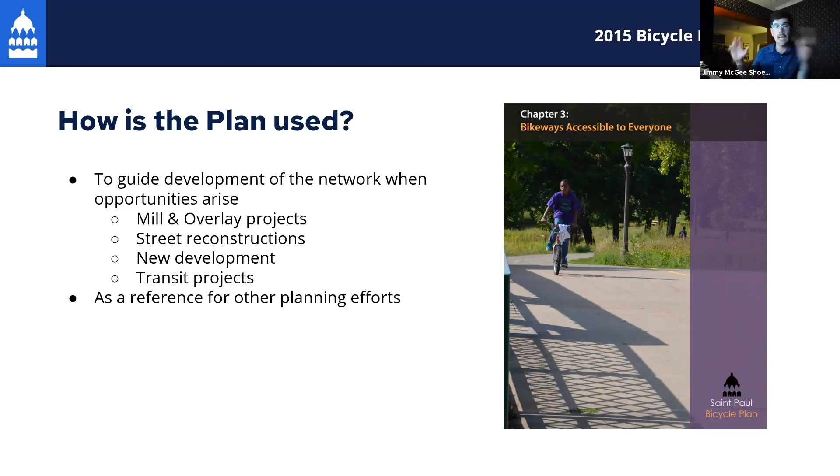Progress we've made since 2015: we've implemented 67 miles of bike facilities added since 2015. I made this presentation about a month ago, and that's already out of date - we've already added more miles this construction season. That includes implementation from our partners at Parks and Rec, Ramsey County, MnDOT, and the DNR.

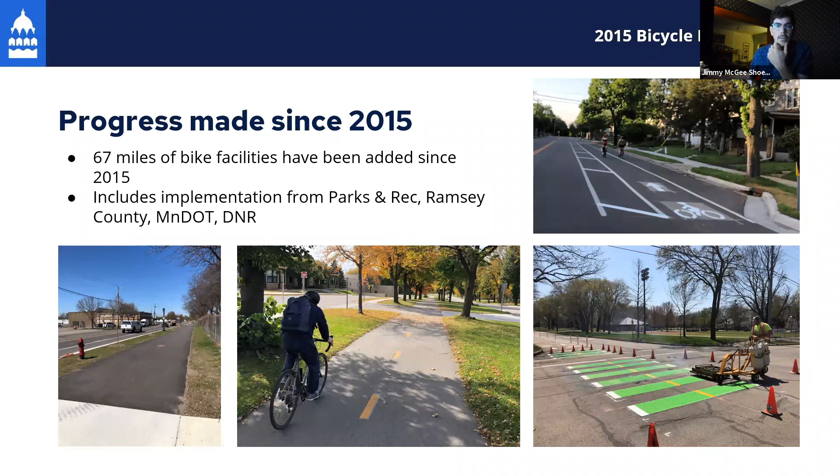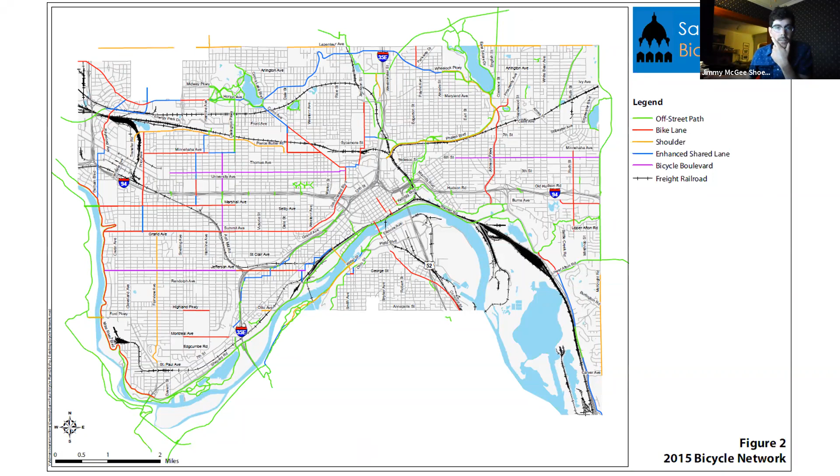This is what the bike network looked like in 2015, basically when the original plan was created and adopted. In those 6 short years, we've added all of this mileage, and the different facility types are represented by different line colors. A lot of miles of bike lanes and off-street paths have been constructed, and you're probably familiar with the Grand Round.

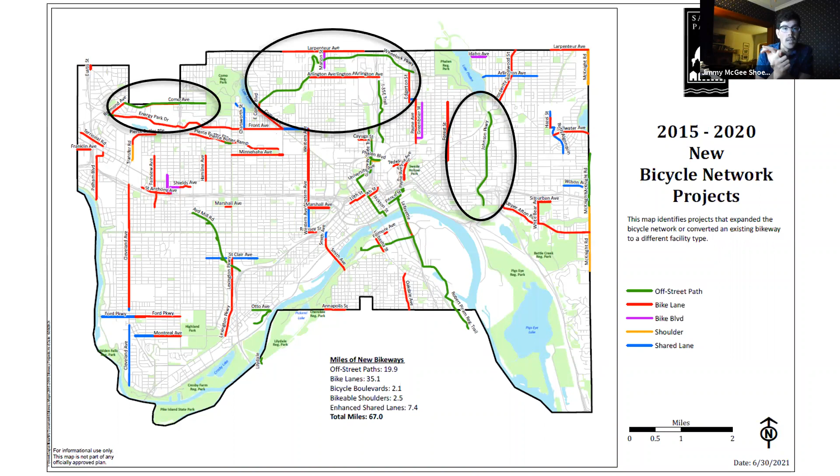This is the time to mention that out of the 2015 plan came some big recommendations. A couple of those big recommendations were: let's complete the Grand Round. The Grand Round is this network of comfortable, off-street bike facilities that link all our parks around the city.

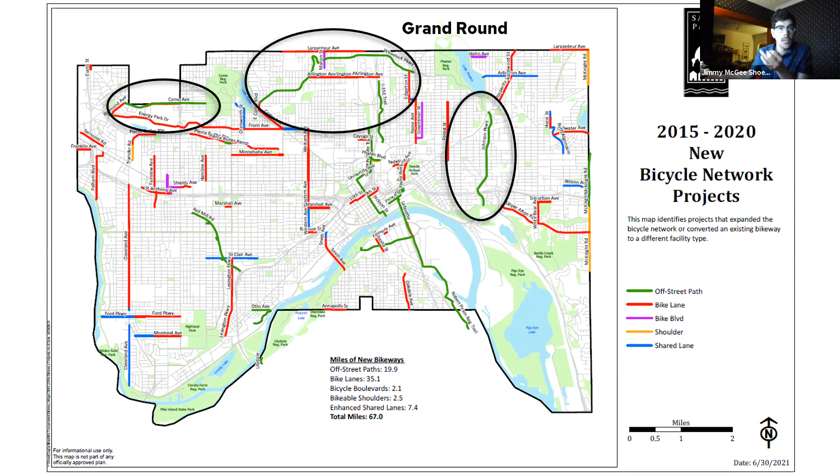So that was one big initiative that came out of it, was complete the Grand Round. And then the other one was focus on downtown bike facilities. So that comes in the form of the Capital City Bikeway, the CCB. We've implemented some of that, and we have plans in the next couple of years to implement more. So I say that to get the wheels turning for you all, because that's one of the big things we want to hear from this round of engagement.

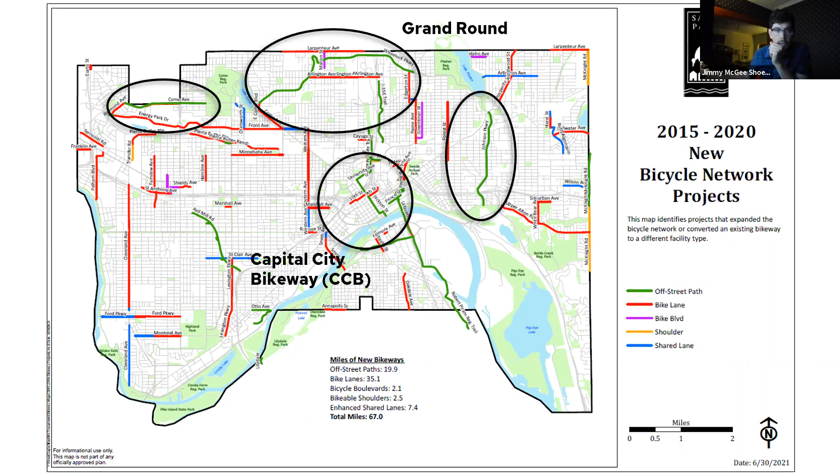So if you put the previous network together with what we've built over the last 6 years, you get this bike network, which was current as of about April of this year, but already is a little out of date, as I mentioned. And you all are familiar with the Grand Round. I've taken this presentation to other districts, and I'm reminded that not everybody knows what the Grand Round is. Of course, the Grand Round is this loop of pretty comfortable facilities that goes around the city.

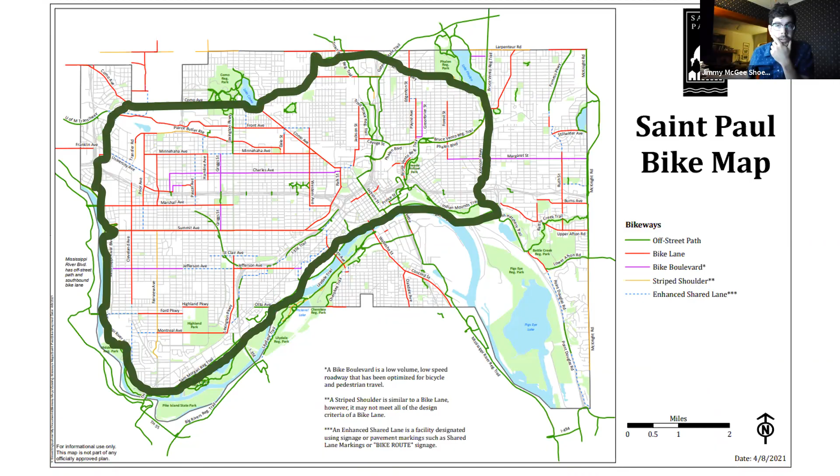The 2019 St. Paul Climate Action and Resilience Plan, which was adopted in 2019, specifically calls for more separated facilities. That's something I'll throw around a lot. Separated facilities are kind of what they sound like. There's separation between where people are biking and where people are driving. And that's a big thing that's coming out of this update.

We also want to incorporate additional construction that's happened over the past few years. So I mentioned the Capital City Bikeway, Highland Bridge at the Ford site, and the Grand Round. And then specifically, like I mentioned already, we want to identify new priorities. So what's kind of the next big thing for St. Paul? And that is a question on the survey, to plug that again.

In response to community feedback, we hear all the time from folks that bike lanes are good, but I need more separated facilities to feel comfortable riding with my 85-year-old mother or my 8-year-old kid. So we want to be conscious of that feedback. Things have changed since 2015. It's amazing how quickly best practices in bike planning and design can change even since 2015. So we want to update the plan to reflect that.

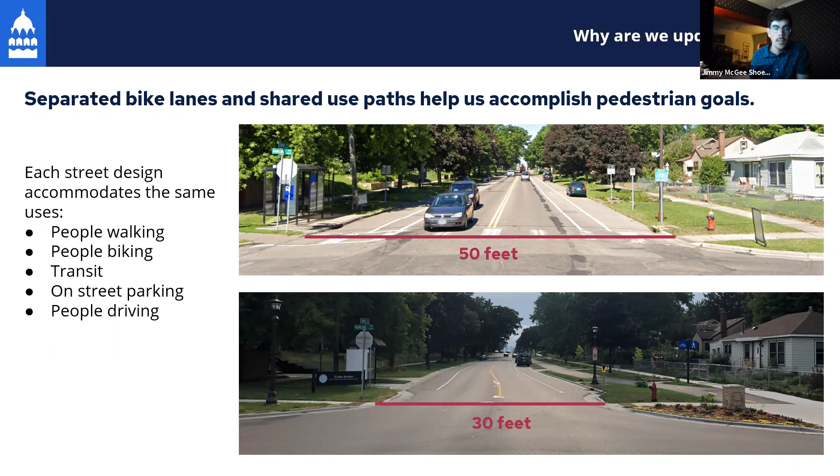That's another reason why we're updating the plan. And then finally, operation and maintenance. I mentioned this a moment ago, but our street crews work very hard to clear snow and patch potholes, but frankly resources are limited. With very few exceptions, as we've built out the bike network since 2015, operation and maintenance funding has not kept up with that expansion. So our operations teams are being asked to do more with the same amount of funding. We want to be explicit about that need, and we ask our district councils and advocates to advocate for more funding, because that's really what's needed.

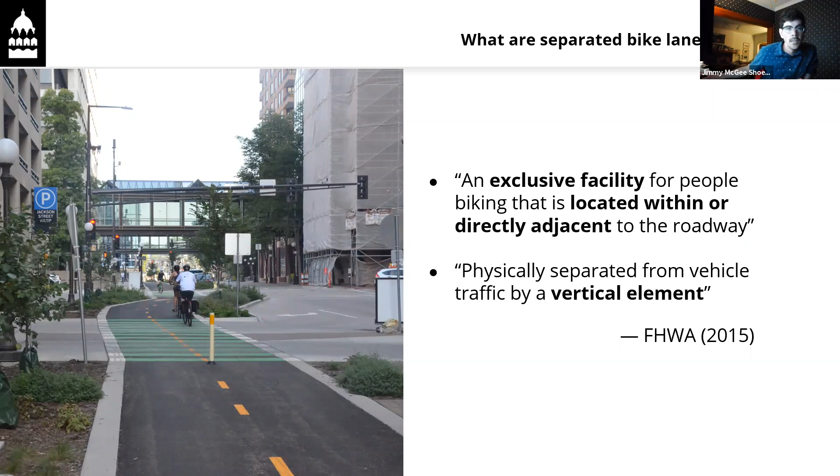Separated bike lanes, a great example of this is on Jackson in downtown St. Paul. It's an exclusive facility for people biking, not a shared space between people walking and biking. It's located either within the roadway between the curbs, or behind the curb, but it has to have some vertical or physical element that separates people biking and driving. In this case, you see a planted buffer, trees, a curb, a sign, a physical barrier between people biking and driving, and then there is pedestrian space over on the left side.

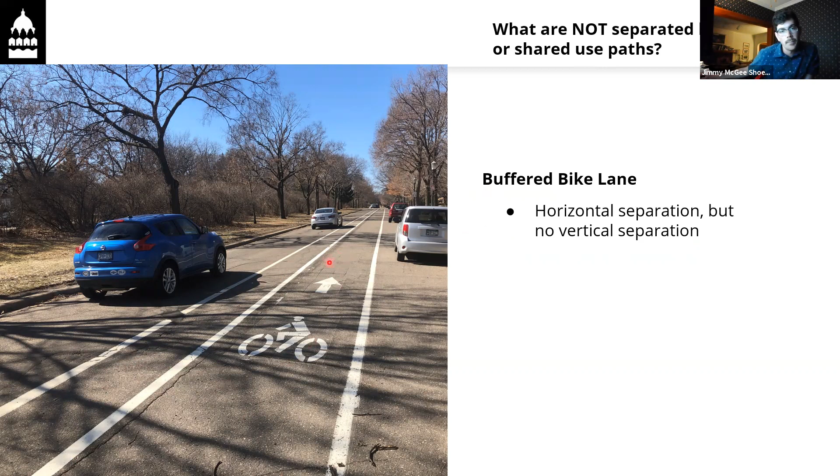A buffered bike lane gives a little more horizontal separation, like on Energy Park Drive or Summit Avenue, but it does not offer a vertical physical element. Bike boulevards are something else we'll continue to construct, shared spaces between people biking and driving, but we like to add traffic calming where we can afford to, to encourage lower vehicle speeds so people feel more comfortable biking with that traffic. We typically only construct bike boulevards on low volume residential streets.

And the lowest facility on the ladder is something called an enhanced shared lane, which is really not much more than signage and striping. We would prefer to never construct these, but where there are constraints we might continue to. I wouldn't say we're totally doing away with them, though we are trying to limit our construction of those.

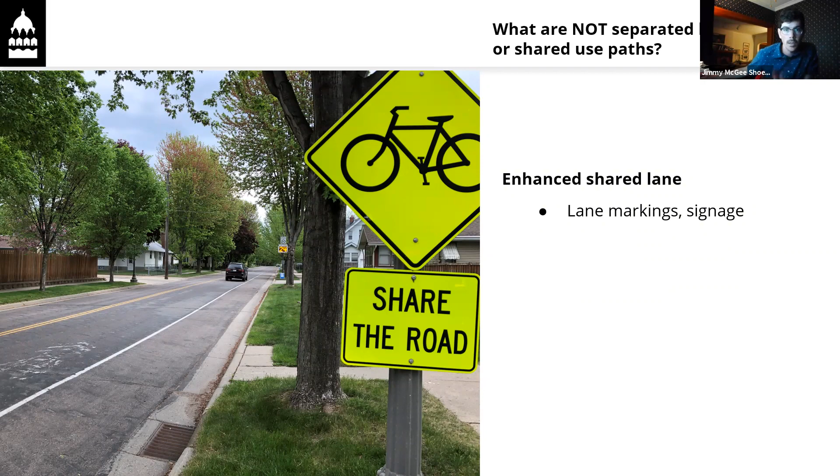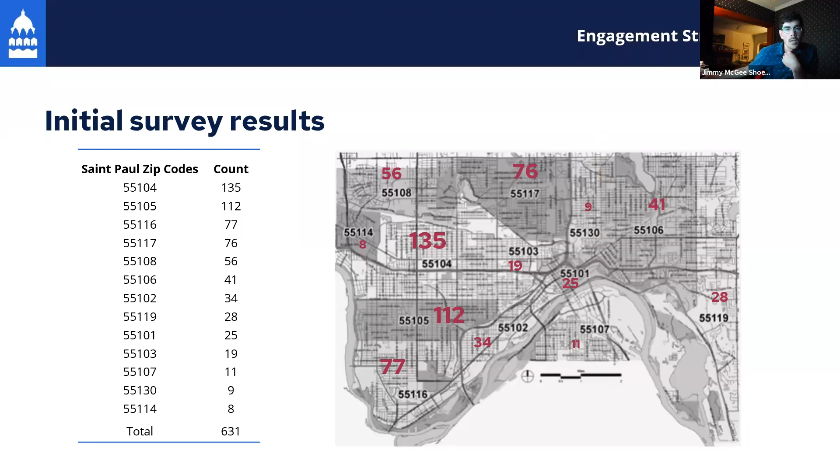A couple weeks ago I crunched some numbers—this is a bit out of date, from when we had about 800 surveys. Of those 800, about 630 people gave their zip code, and these are the responses collected from zip codes in St. Paul—so you're probably in 55104, 55107, or 55108. We've heard a lot from you all, but I'd encourage you to promote this more; it closes October 31st. We've heard a lot from Macalester Groveland and Union Park, a lot from Highland, and a lot from the North End and Payne Phalen. We're going to continue working with areas where we haven't heard much.

Some of the initial survey results, from open-ended questions: people are asking for safe and separated bike facilities and a connected network of those—we hear that all the time. Winter maintenance of the bike network is something we're hearing a lot, as I mentioned. Connections to and from downtown—people want to be able to bike there. Connections over barriers—St. Paul has a lot of railroad tracks, 94 and 35 and 61, and the river. Also more bike parking—people want more places to park their bikes—and generally slowing traffic down in their neighborhoods, so they can bike on their neighborhood street.

So I haven't gone through all 1,100 responses. I'm kind of wondering how I'm going to do that, but I will. So fill out the survey, please.

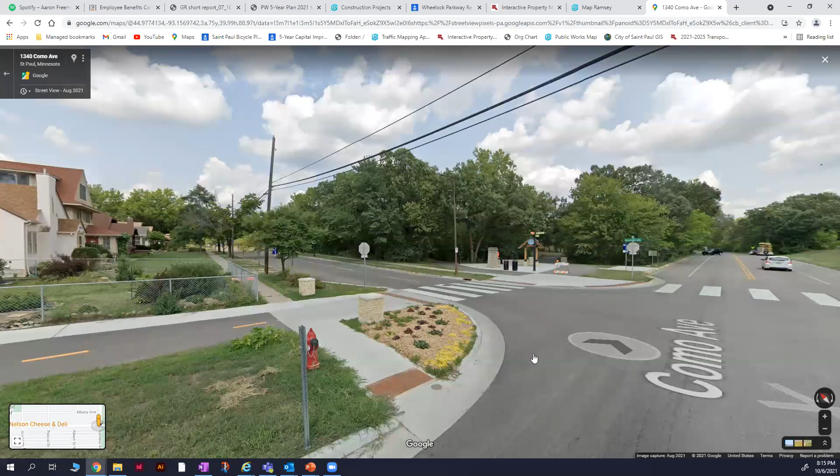There's one, I think Dolores might be mentioning a stop sign near Snelling that looks from the bike path like a stop sign, but I'm talking about car traffic. Hamlin and Como, that one I've seen them go right through. Because that's the same thing, I almost hit somebody at night at that same intersection, cars rolling through without looking.

Both might be thinking that they're yielding and then not really seeing that from the other perspective. But if a car is supposed to stop at that corner, isn't a bike supposed to stop too? Yes, that's what they're not doing.

Not all the time unfortunately, but there are a few, and I've almost hit them because they're going so fast, I didn't even know they were coming.

So I guess there's more education or something has to be done, and I don't know how the city's going to do that, but people have to be educated on the rules of biking. Yeah, there are bad behaviors out there, I guess.

And then the problem is the motorist is always blamed because they hit the person. I mean, I think it's also on their onus to not do that. It's more the onus on the driver, since they're in a 2,000-pound vehicle. But if bikers are moving so fast, there are things you can't see coming until they're there, you know what I'm trying to say?

Because that has happened, I almost hit somebody like that. I had stopped and looked and they weren't there, and then all of a sudden they were there, going right in front of me, and I almost hit them. So I don't know, it's scary.

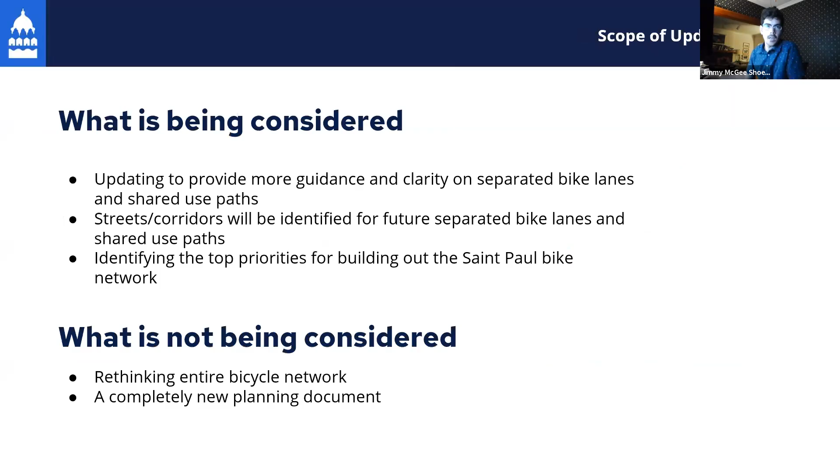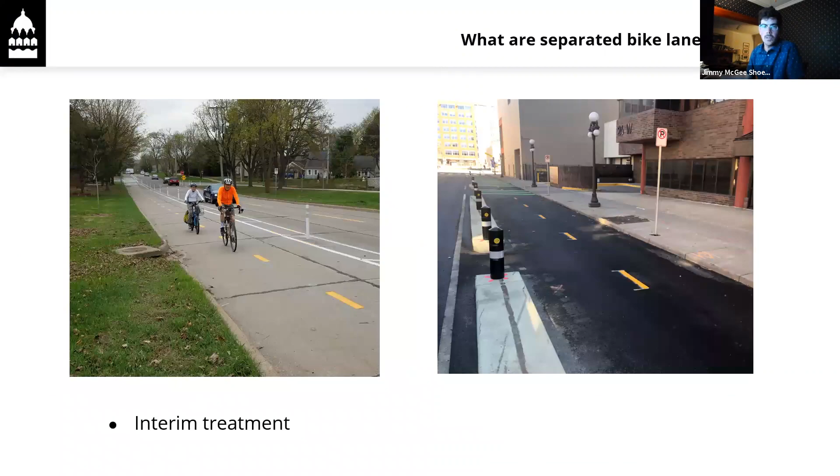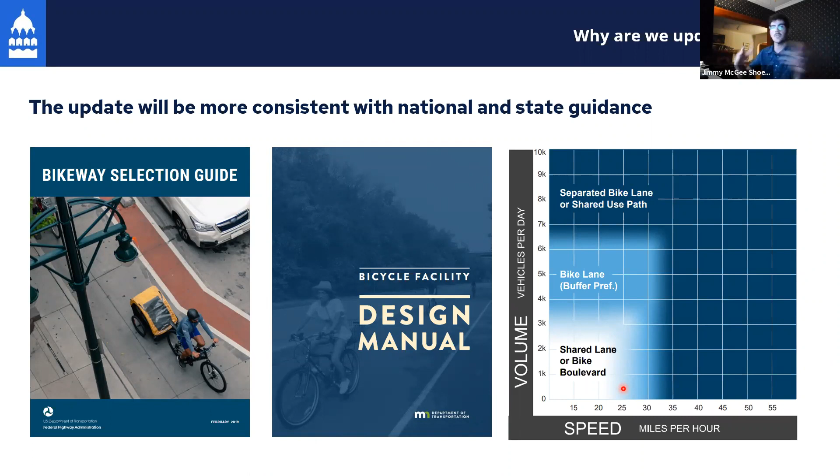We're probably going to assume people are going faster than 25. And so when we reconstruct streets, there's something called the design speed—you design a road for a certain speed you're trying to achieve. That's why on the freeway, the design speed is for 55 or 60, and curves are more gradual and lanes are wider because that's the speed you're designing for. That's just part of the transportation engineering field: if we want slower speeds for cars, we have to design our streets to make them go slower.

That's an example of on Como, where right here at Hamlin we narrow this throat—it's called a bump out or a curb extension. Narrowing the roadway, if you've ever driven on a narrow road in Europe or something, you go slower because it's so much more narrow. That's something we try to do whenever we redesign streets: make them a bit more narrow, especially at the corners where people are crossing.

Yeah, that's all great info. Vehicle traffic, slowing traffic down is one good way to get more people on bikes, basically. I am hesitant to use shared spaces just because of how fast traffic is whizzing past me. Yep, you're not alone. Yeah, I'm sure I'm not.

I just, anecdotally, know the city pushed to lower speed limits, and I'm not sure how effective those new speed limit signs are. I see a lot of new signs, but I don't see a lot of people driving slower. Yeah, we look to other cities—there is some research, I believe out of Seattle, that looked at only lowering the speed limits. You wouldn't expect people to necessarily drive slower, and they did see some reduction. It's more than just putting up speed limit signs.